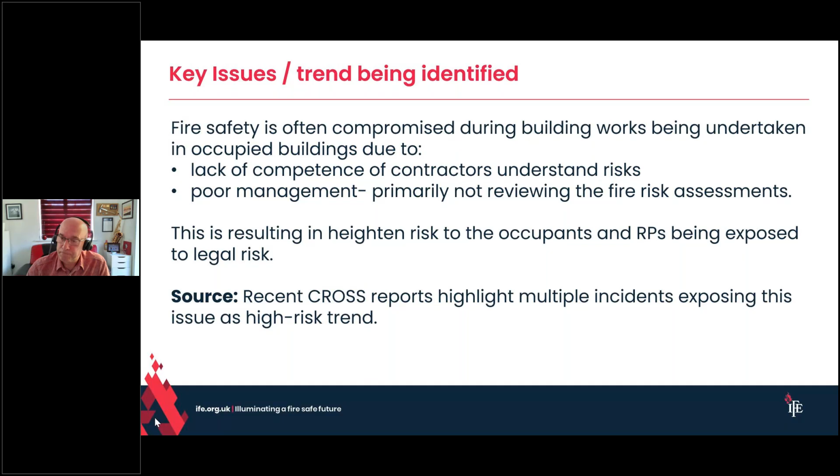So I'll just quickly explain CROSS, and I've got a couple of slides explaining where we come from and how you can contribute to the building safety around you. So I'll also talk about these safety systems I'm talking about. I'll go into a bit more detail on them. I'm also going to talk about the importance of the fire risk assessment reviews.

I'm going to briefly touch on small contractors and in-house maintenance competence. And I'm going to mention the heightened risks during combustible cladding remediations. And finally, I'll end with some pointers and actions that we believe are worth highlighting to RPs and managers and contractors during building works. Next slide, please.

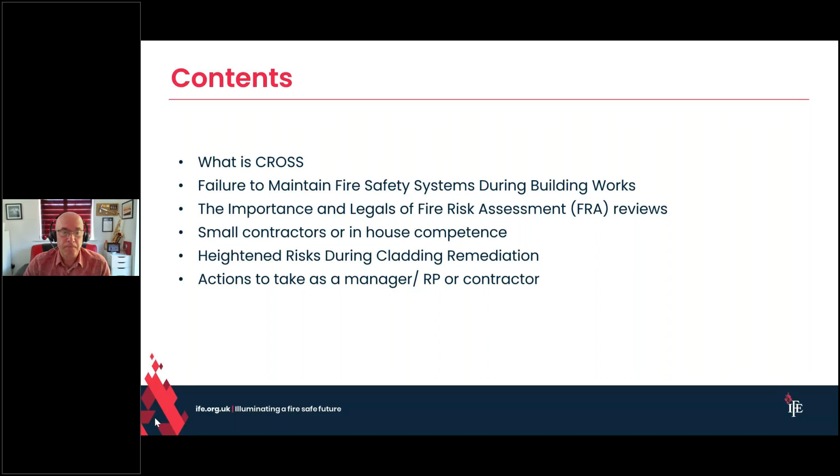So what is CROSS? So in 1976, after the Ronan Point collapse, the Standing Committee on Structural Safety was set up, called SCOSS. This was set up by the IStructE and the Institution of Civil Engineers, and this was to identify trends and developments that might risk structural safety. And in 1995, it received HSE support as well. That was the foundation of where we are.

Then in 2005, a voluntary confidential reporting system was set up. It was called Confidential Reporting on Structural Safety, and CROSS was born as a name. The concept primarily came out of NASA and the aviation sector. It was not a whistleblowing system, but it was a confidential reporting system, the primary aim being to extract the learning out of events. It originated more than 30 years ago with the aviation sector reporting system, and CROSS, as in the 2005 setup, was set up to reflect that confidential nature, the aim being to extract learning.

Then post Grenfell, 6 months after Grenfell, Dame Judith Hackitt produced her interim report, and Dame Judith subsequently went on to make a distinct recommendation that CROSS should be extended into fire safety and strengthened. And so CROSS, as in Collaborative Reporting for Safer Structures, was born. In 2020, the UK government provided funding to expand CROSS and fulfill the recommendation of 1.4C of the Building Safety Act. So CROSS began working with the Institution of Fire Engineers to develop and run CROSS UK for fire safety. Next slide, please.

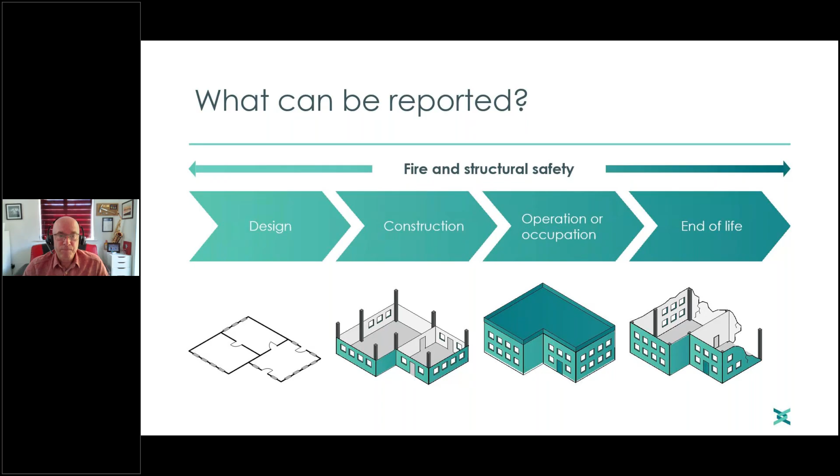So where we came to start seeing this trend, we had two reports in quick succession describing 3 buildings where AOVs, automatic opening vents, smoke vents, had been disabled during and following remediation works. So report 1347 highlighted 2 buildings undergoing cladding remediation where automatic opening vents were rendered non-functional for months afterwards. In the first case, this was due to the contractors improperly disconnecting the AOVs from their electrical components. And in the second case, the new cladding was screwed into the frame of the existing AOVs, rendering them inoperable.

And then we had a second report of very similar nature where a contractor had masked up the window style AOV vents, and I'll explain the detail of what these window style vents are in a moment, possibly mistaking them for windows, which is by design, before applying a render finish to the walls. So these 2 reports and 3 buildings led us to think that this could be a safety issue. So we issued a CROSS safety alert in November last year about this as well, which is the image on the right.

So AOVs, these vents play a crucial role in smoke control systems in buildings, and their impairment, whether deliberate or inadvertent, significantly increases the risks to occupants and firefighters in the event of fire.

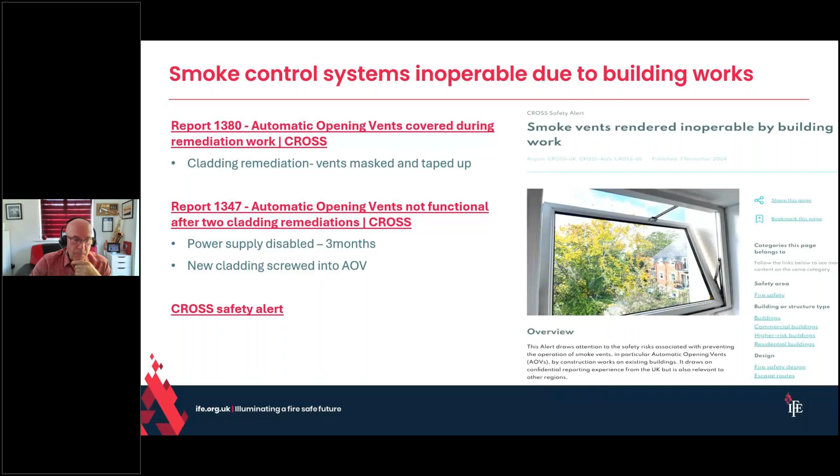So firstly, just going to mention what a window style AOV looks like. There's a number of types of AOV. It's an automatic opening vent. The window style ones are like the ones in the right hand 2 pictures. One is from inside a building where an AOV is opened, and it looks like a standard window from the inside and the outside. And the picture slightly to the left with the safety rails on the window, the one above that is an AOV as well. So these are both very easy to mistake for normal windows, and contractors, or yourself as a manager or an RP, may not even be aware of these.

So there are other ways of controlling smoke in the common parts of residential buildings in particular, but we're not hearing so many issues around natural smoke shafts or mechanical extraction vents. These are normally identified. The natural shafts or the mechanical vents sometimes look like cupboard doors in the corridors or in the lobbies, and they'll usually have a label on, "Do Not Obstruct." Or you might see vent grills as well. And if I'm wrong, send me a report. We'd like to hear if you have come across places where these have been disabled inadvertently as well.

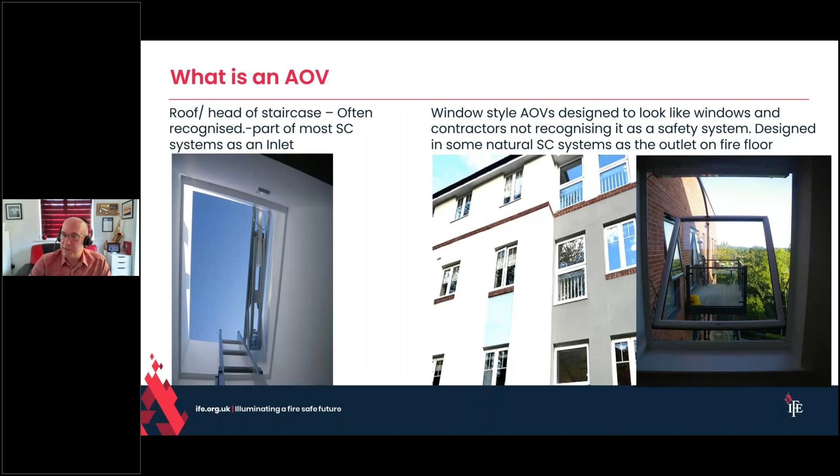So also, this is where we start to put the building works being one of the critical factors in all of this. We also had report number 1336, where building work was being undertaken in a supermarket warehouse and the sprinklers were disabled there while works were ongoing. But there appear to have been no controls put in place to mitigate the action.

The expert panel highlighted a fire risk assessment review was fundamental before this action was taken, and a fire occurred leading to significant loss and difficulties for the fire crews trying to control it within the warehouse area. Again, lack of control under CDM regs, similar to before, and critically, regular communication between contractors and management appeared lacking.

Another report we got, which we've tied into this, is 1237, where a smoke control system was found to be faulty and the repair was going to take a week waiting for parts. It was correctly reported to a fire brigade under the Fire Safety England regulations about essential firefighting equipment. Great, but then they proceeded to do nothing to control the risk. So they've told us, a fire brigade, that there was no smoke control system in the single stair building, but then proceeded to resist doing anything about it.

So fundamentally, a fire risk assessment should have been done at the point they knew that the system was out of action for more than 24 hours, I think is the Fire Safety England regulations threshold. And then what they eventually did was put in place a simultaneous evacuation strategy until it was repaired. But it's all well and good reporting the issue, but you have to control the risk. Your risk assessment is no longer suitable and sufficient if it doesn't have a fundamental feature of the safety systems, the active safety systems, in place.

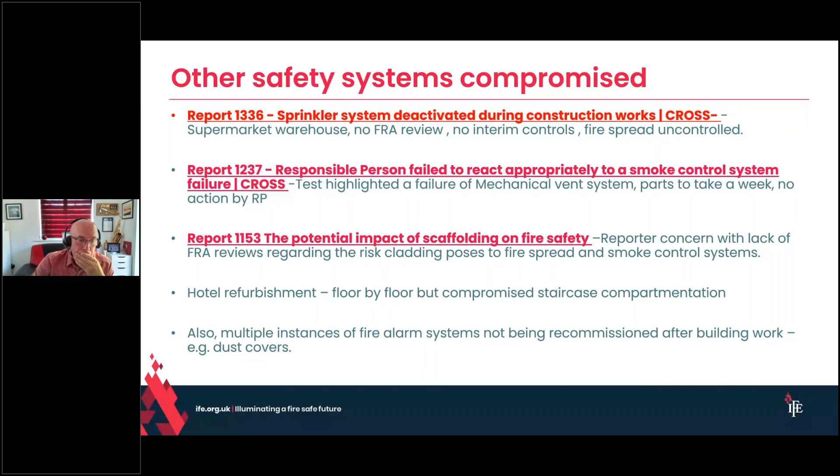So another two reports were about building works continuing in newly built buildings. It's a very similar vein, but these two reports highlight where there's a rush to occupy a building. So student accommodation report 1214 highlights there was partial completion of compartmentation and fire alarm systems in place, and they were occupying parts of the building.

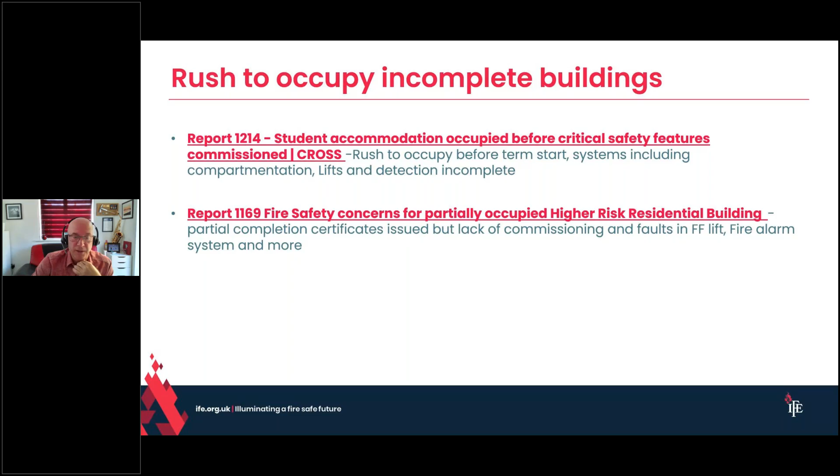One was also a higher-risk residential building, and this is before the gateways, so hopefully the gateways will prevent this in future. But again, the risk assessment should have been reviewed to reflect the building's live state rather than what it was intended to be built as. And it must reflect and control the risks as found, not the systems being planned or still under construction. Next slide, please.

So just a brief recap on the law around reviewing your fire risk assessment. There's a legal duty to maintain the fire risk assessment as a live document, and it applies throughout the UK. In England and Wales, these requirements are imposed by the RRO as amended. That's Article 9.3. And so these are the two quotes: where there is reason to suspect it is no longer valid, e.g. the smoke control system is not working, or there's been a significant change, i.e. you're planning major building works, you're planning on putting scaffolding up the side of the building. So they're the two primary factors around reviewing your fire risk assessment.

In Scotland, similar requirements are imposed by the Fire Scotland Act in conjunction with the Fire Safety Scotland Regulations. And in Northern Ireland, similar requirements are imposed by the Fire and Rescue Services Northern Ireland Order in conjunction with the Fire Safety Regulations Northern Ireland 2010. So it's a UK-wide requirement to have a risk assessment.

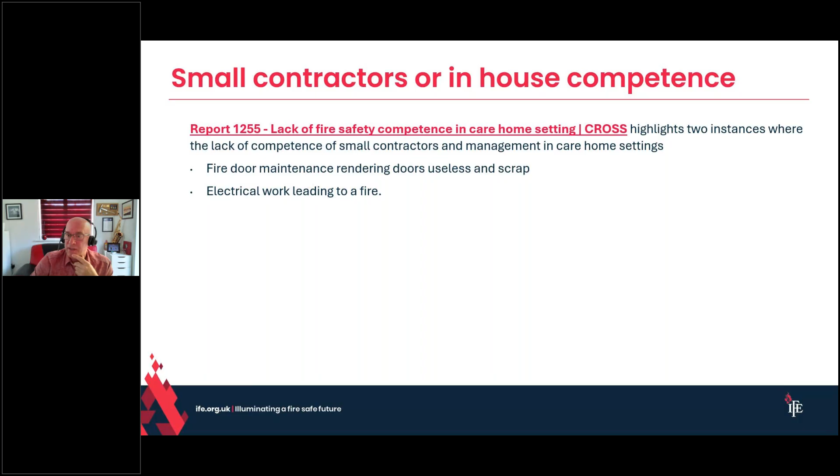Just want a brief mention on cladding remediations, as this is a topical subject. It's cross-cutting with what I've discussed earlier; cladding remediations and risk assessments obviously must be reviewed during these processes. You're looking at if there's any increased risks during this process, i.e. you're exposing cladding materials, maybe a flammable core even, you're putting scaffolding up and safety screens, which may affect smoke control systems. Are you blocking smoke vents? And also control of hot works and cutting as well is critical within this stage.

So putting in place controls, your risk assessment should look if the fire strategy is still viable. And in exceptionally high-risk circumstances, and this is probably the rarity, I would suggest that the evacuation strategy needs to be looked at. I've not heard of any cases yet, but I suggest it is a possibility, albeit an unlikely one, that the occupation of the building may be in question as well. So it's worth ensuring that you have a good fire risk assessment in place to put controls in place to avoid that if you can. Next slide, please.

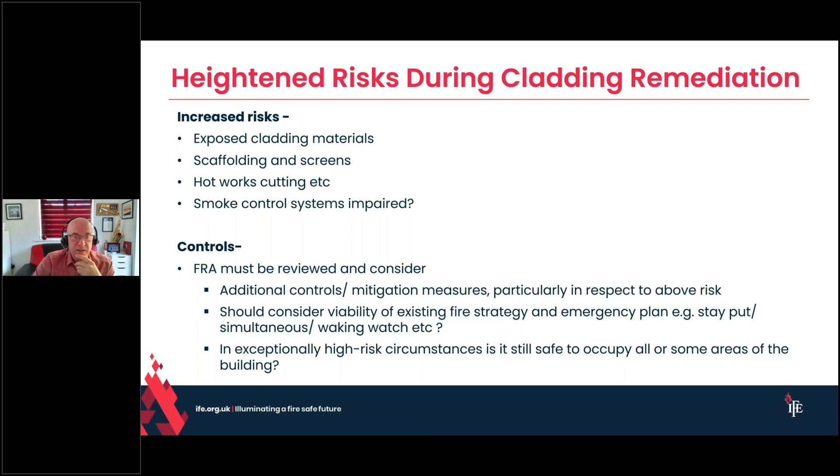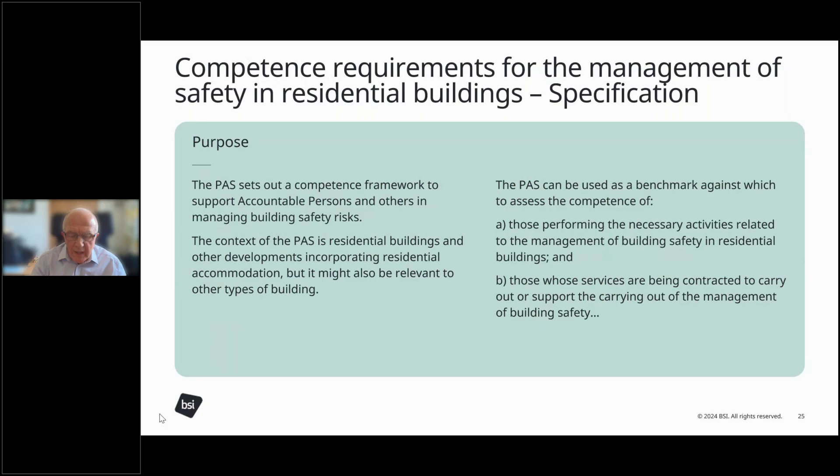We can have the next slide, please. I said initially there were other standards which related to this, so we'll spend just a few moments on this. In fact, there is a suite of standards, and perhaps not surprisingly, you see at the top there that there are standards, or PASs, in relation to the principal designer and the principal contractor. Those were developed in parallel with this PAS, and collectively they represent the competencies in relation to building safety management with respect to residential buildings.

You'll also see in the note there's a reference to BSI Flex 8760. Well, that's now British Standard 8760. That's the overarching standard which, if you like, allows then others to come later and develop competence frameworks which fit in. So if you're thinking ahead, that's something that you would want to do. You don't want others coming along later and creating something which runs into conflict with the whole purpose of this exercise.

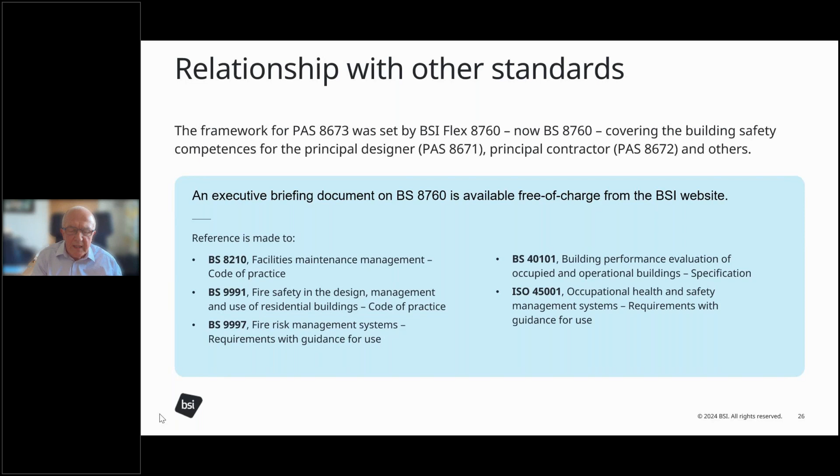And here we'll have a look at the scope of this PAS and the key principles. So if we just run down on the left-hand side there, you can see the competence requirements. Building structures, systems, and building services. Systems and components, or rather the interaction of them.

Practices which will maintain buildings safe for occupants. Risk management, very clear what that is about. And then managing the golden thread of information, making sure that there is that history of everything that's gone and everything to the future that will come, so that there is a single source of truth about the particular building in question. Nothing stays the same, so managing change is important.

And here you'll see the first instance, in effect, of that word behaviour. There's lots of technical competences, but behaviour is something which will make a big difference for the better if it's the right kind of behaviour. And we'll touch back on that in a little while.

Leadership, communication and planning. So we need to be properly organised. We need to know what's happening. After all, we want an approach which is comprehensive. And lastly, ethical behaviours, adherence to professional standards.

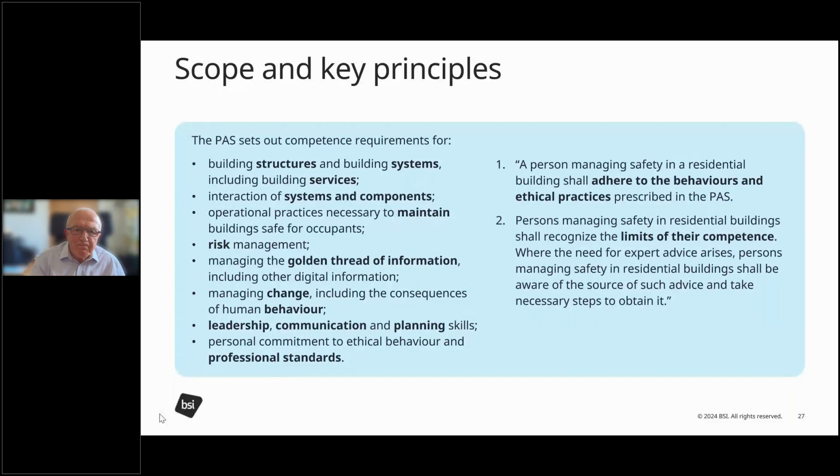Now we get into quite a bit of detail here, and it'll go on and on into a lot more detail if we allowed it to, but we're not going to do that. So we're looking at this on a fairly high level. These are the competence areas. And I know as I'm talking, you'll be looking down the list there. I'm just going to draw out a few of them, and then I'm going to pause on those towards the bottom just to make some additional points. I don't think it's productive to just go through lists of items like this,

but certainly at the top there in the operating environment, you can understand that there is an environment within which people are performing work, and there are certainly responsibilities, accountabilities, and so forth. Then there's that aspect about people, behaviours, teamwork and leadership, understanding how buildings work as systems and with the interaction of various components. And we've heard already about the kind of things that can go wrong from Ian. So it is important that people do understand thoroughly these aspects.

The operational practices, maintenance work which is being carried out, construction work and so on. Risk management, I don't mean to do this a disservice, but it is what it is. It's absolutely essential, and I think this is an area that really does need improvement generally across industry. And last, the one I just wanted to dwell on a little bit, the planning, monitoring and control. Some of you might be thinking, goodness me, project management, got to be doing that.

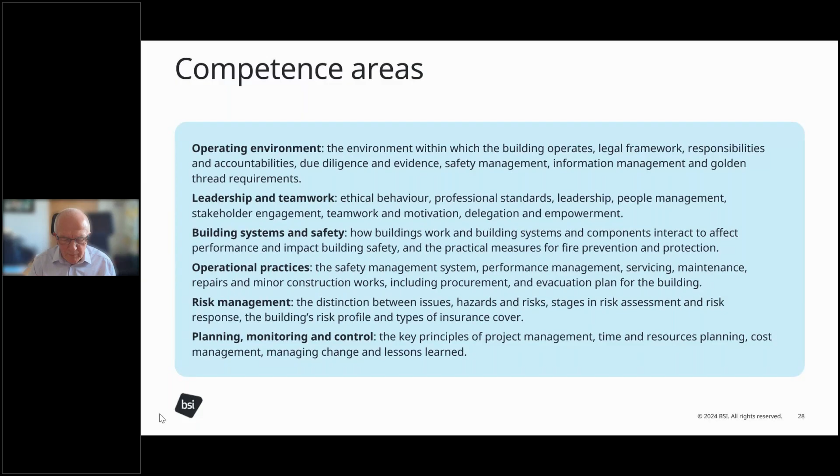Key principles. It's possible to equip oneself with the key principles and to separate the fact from the fiction, the myth from the reality. And so for completeness, we have to have these various competence areas in place. We can move on to the next slide, please.

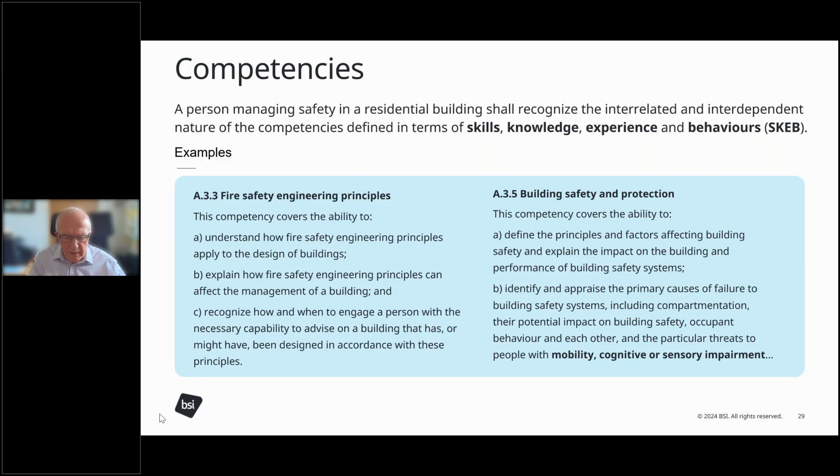So it is important to acknowledge the Property Institute. You'll find Property Institute, if you didn't know already, at tpi.org.uk, and their Building Safety Hub with the .org.uk at the end of it is an excellent resource. And I do urge you, if you're not aware of those opportunities, to seek them out. And perhaps I should apologise for not actually having them on there. But next slide, please.